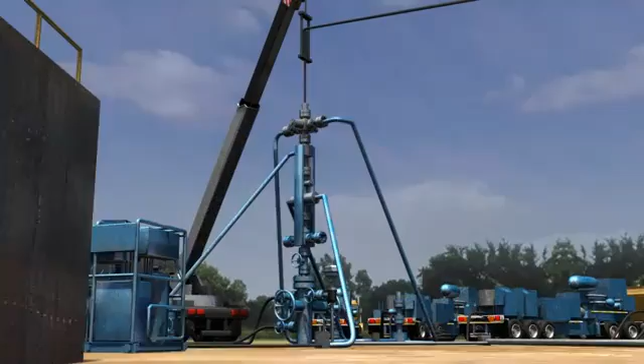The QUIK composite plugs are an essential part of advancing reservoir efficiency during fracking operations. Baker Hughes composite plugs have been used in some of the most prolific wells in unconventional reservoirs. The composite plugs have been engineered to function specifically in horizontal as well as vertical wellbores.

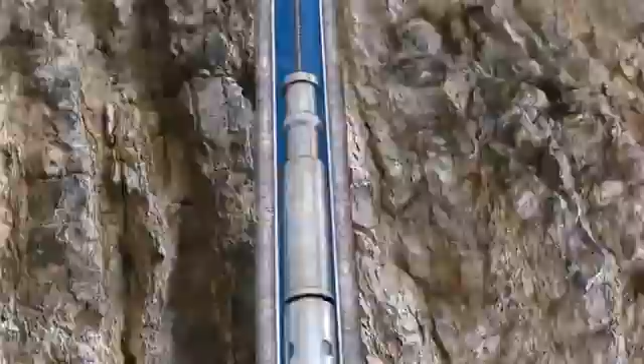In horizontal wellbores, the bottom hole assembly is typically deployed on wireline. The bottom hole assembly consists of the perforating guns, setting tool, and the composite plug.

Once the plug reaches the target depth, the pumps are shut down and the tool string comes to a halt. The plug is then pulled back to setting depth to ensure tension in the wireline.

A signal from the wireline truck is then sent down the wireline, which activates the industry standard Baker E4 setting tool. The signal triggers the setting sequence and the setting tool strokes, causing the slips to engage the casing and pack off the elastomer, thus creating a reliable seal.

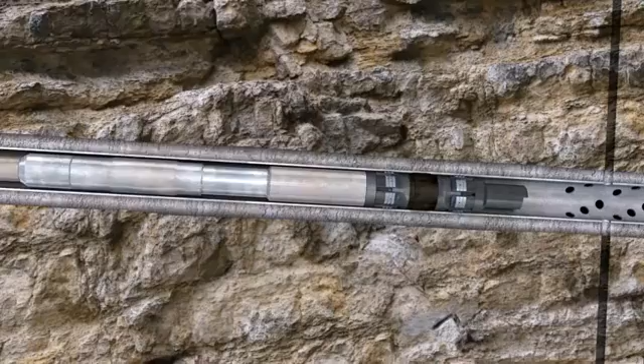The bottom hole assembly is then pulled back up hole to commence the next operation.

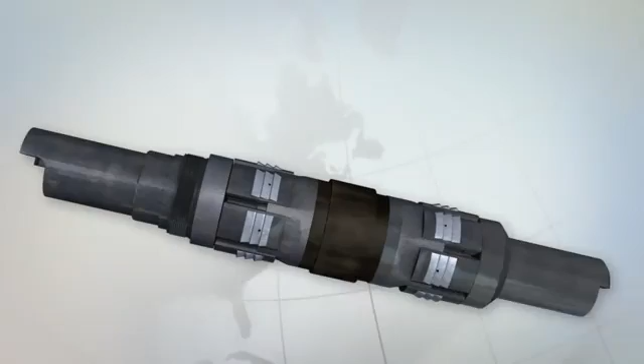Shear pins tend to flex, thus changing the shear area and creating an inconsistent final setting force. Baker Hughes composite plugs use shear rings, which utilize a threaded connection, providing a secure link from the tool to the rest of the bottom hole assembly, and in addition provide a more consistent shear area.

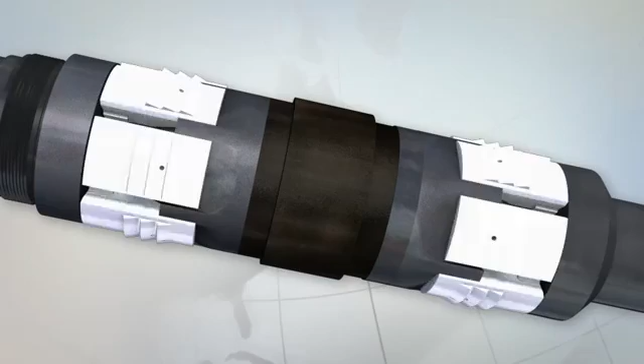The Baker Hughes slip is made up of radial slip inserts molded into the composite slip body. The slip insert is made of cast iron and has a groove notch on the back that creates a stress riser during removal, therefore producing smaller sized cuttings.

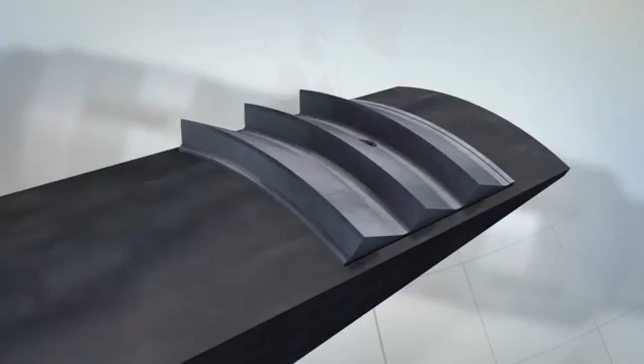The composite slip body is one piece, which makes it rigid and robust. Baker Hughes slip design provides for maximum casing bite while minimizing the amount of cast iron.

The innovative elastomer design has been the cornerstone of Baker Hughes composite plug success. This composite plug design is unique in the marketplace because it does not require any backups to support the elastomer during pack-off. The continuous diameter packing element allows for high flow rate bypass without the possibility of presetting or swabbing.

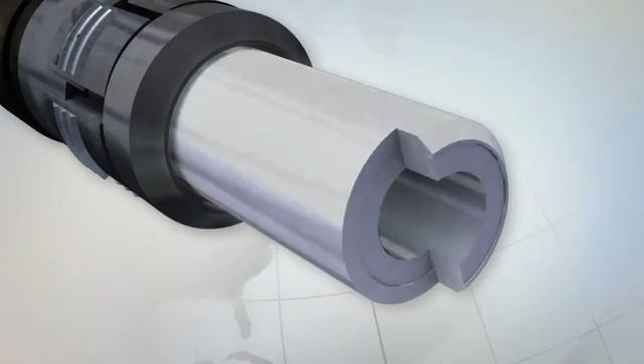This is extremely critical during horizontal deployment completions, which require higher pump rates to navigate the horizontal wellbores. The clutch cut on the upper and lower end act as an anti-rotation mechanism, maximizing the removal efficiency.

There are three types of composite plugs which can be used: a bridge plug and two types of frac plugs, a poppet style and a ball type.

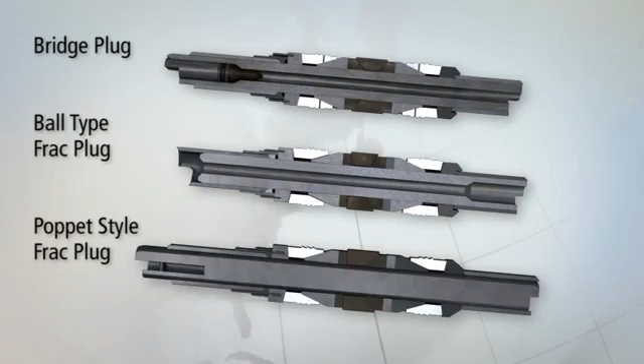The bridge plug is a solid plug which holds pressure integrity from above and below.

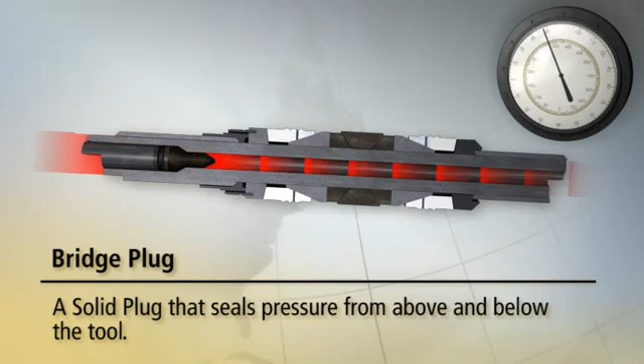The frac plugs act as a one-way check valve, holding pressure from above but allowing flow through the tool from below.

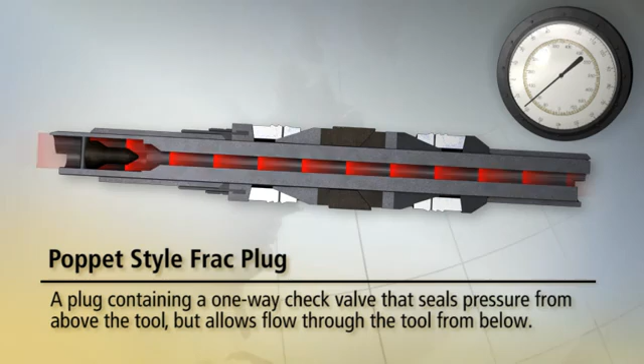The ball-type frac plug relies on a ball being dropped after perforating and is the plug most commonly used in horizontal applications.

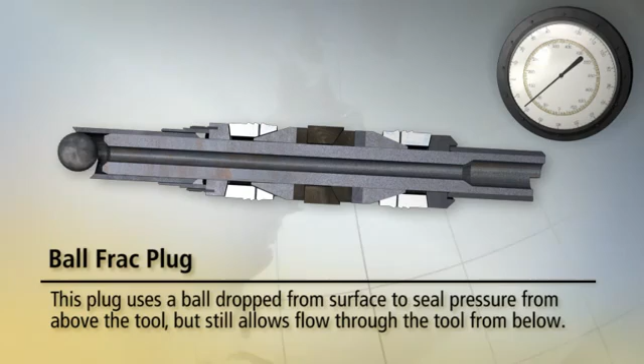We will be using a ball-type frac plug in this animation example.

The bottom hole assembly is then moved up hole and the guns are activated. This process is repeated, producing cluster perforations over the span of the pay zone and creating multiple entry points for the fracture stimulation.

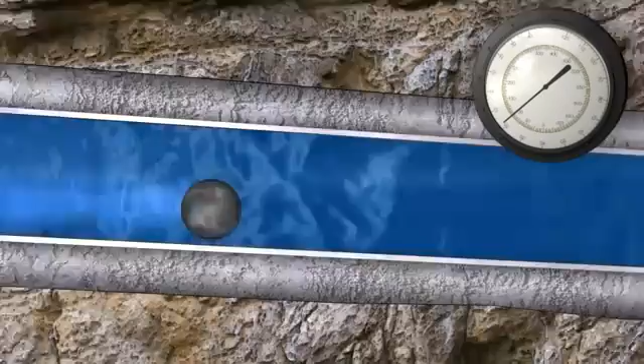The ball is then dropped from surface and pumped onto seat. A pressure spike as the ball seats is the indication that the frac job is ready to be pumped.

The frac job is now completed for this section, and this sequence is repeated as many times as necessary. Once all the targeted zones are fracked, the composite plugs are easily removed with coil tubing, motor, and mill.

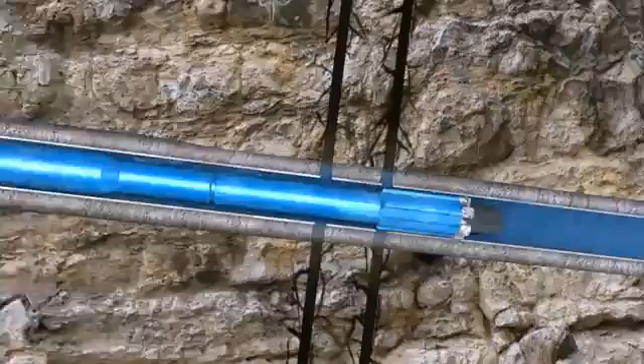The lower section of each plug has a clutching feature, which allows for the plug to lock into the one below it, thus maximizing the milling efficiency.

The investment of a frac job is a considerable amount, and the ability to divert the frac job to the intended interval is key in the performance of the well. When selecting the composite plug to divert the frac job, don't take chances on settling for anything but the best.